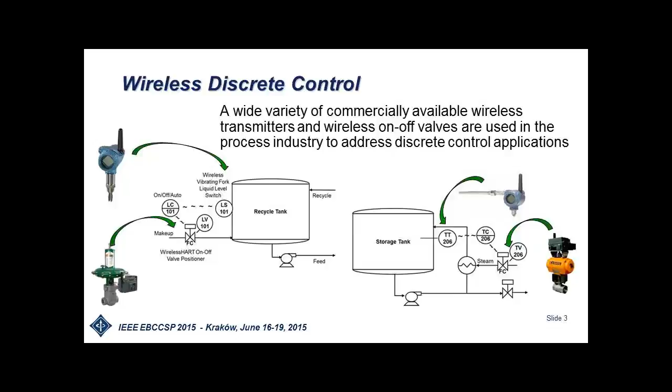In terms of continuous control, there's a wide variety of continuous measurements today to instrument your process control system. Initially those were put in primarily just to monitor what's going on, but people have found that the technology is very reliable. And in many cases, rather than just looking at something, they really want to tie it to closed-loop control.

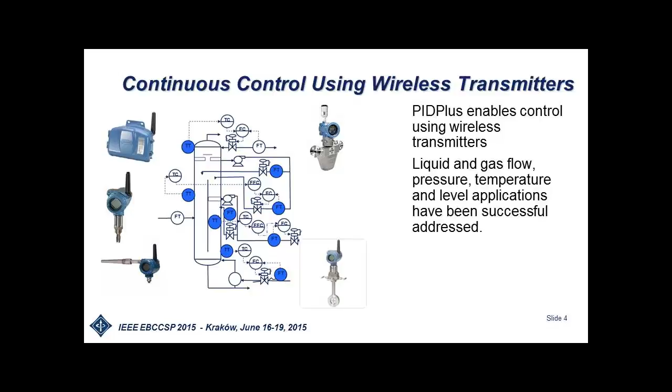One approach to addressing closed-loop control is to modify your PID algorithm to be event-triggered in terms of the update of the reset contribution and the rate contribution. That's called PIDPlus, and there are a number of papers we've written about that. It's a very effective technique for handling the wireless measurement, where the actual tuning of the control is based strictly on your process dynamics—totally independent of the sample rate, doesn't matter. So it's a very effective, very robust technique.

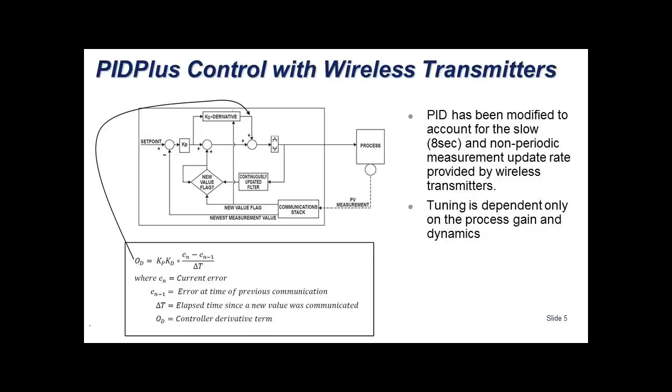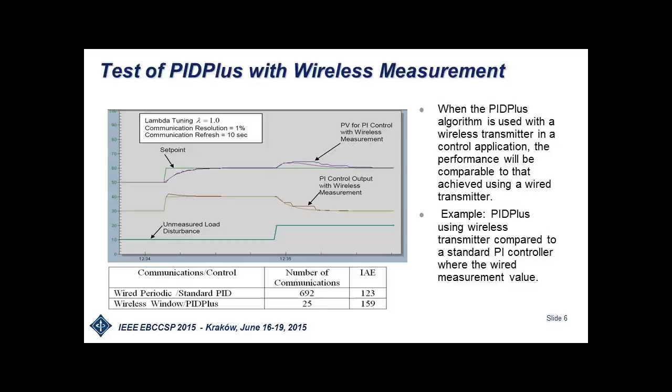But now let's get into wireless throttling valve. There are certain applications where there's a real demand for this, like fracking and oil production. The actual cost of installing field measurements in these oil fields is quite high, and if you can eliminate the wires, you can dramatically save on installation cost. So there's quite a market demand for wireless throttling valves.

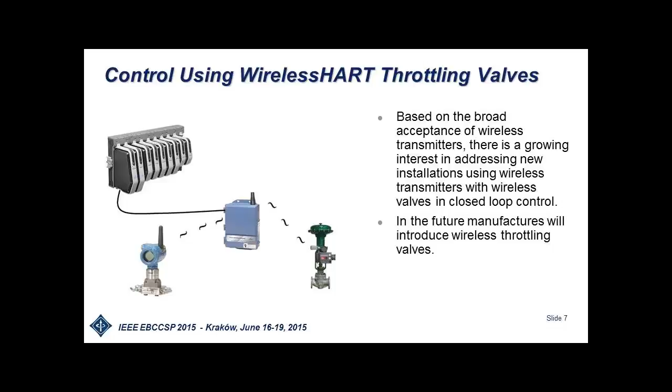Conceptually, if you think about a wireless throttling valve used with a wireless measurement, you'd be taking something like the PIDPlus, and maybe using the external reset, that is the measured position, coming into this network, the positive feedback network used to create the reset action. Conceptually, it should be quite straightforward to incorporate in either a motorized actuator or one that's air operated in terms of a throttling valve.

But in practice, there are a number of challenges. The actual communication to the actuator right now is not scheduled, whereas on your measurement side, all the measurements coming in are scheduled. That means on your measurement side there's very little delay between the actual sensing and using it in control, so you're introducing very little delay or dead time. Whereas here, you can have quite a lengthy delay.

Also, in terms of the actual sensing of where the actuator is, the feedback of that in response to a write command can also be quite lengthy in terms of time because it's an unscheduled communication. There are some things going on in terms of downstream publishing that are going to improve this, but today there's quite a bit of delay, and even with downstream publishing, you'll still have some delay there. So that's really the challenge.

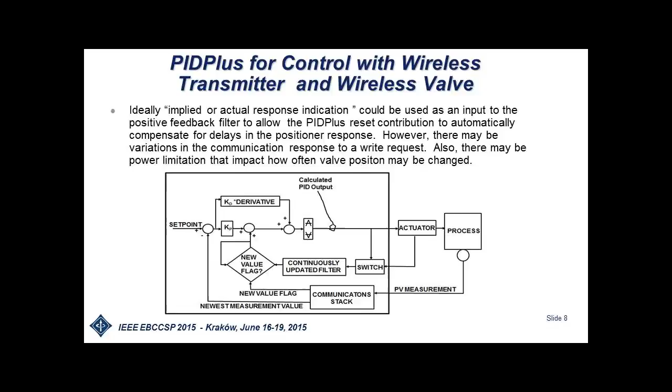So one of the things we tried that has been quite effective is where we have the calculated output only communicate if certain criteria are met. The criteria is that the output has to change by more than this deadband from the last communicated value.

So periodically we're going to evaluate this, we're not evaluating it constantly, we do it periodically. So if we have exceeded the deadband and we have gotten a response from the last write command, then it's valid to actually output a new position to the valve. This minimizes the number of times you're actually going to be changing the output.

There's also this default time which says if I haven't changed by more than the deadband, but the time since my last communication has exceeded the default, then go ahead and communicate it anyway. That allows you to drive the output to exactly a value, not being limited by this deadband in terms of your resolution. So that's what has been used in terms of minimization of movement.

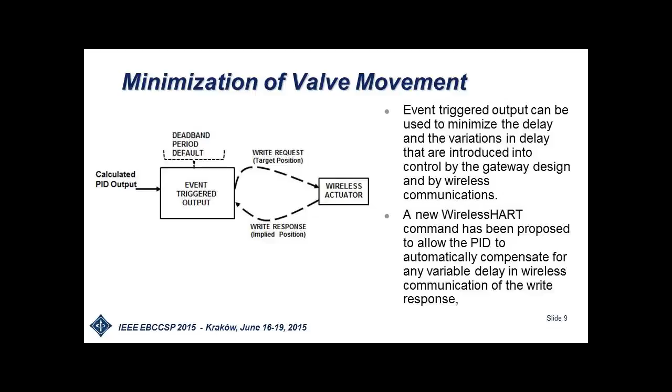The other thing we are working with is a new HART command. Using WirelessHART for wireless communication is introducing a new command called time to apply, which says that when I ask for a change in position, I also communicate when the valve should change in the future.

Because if you look at this, we'd really like to know where the valve is to be able to use that in our positive feedback network. But if we have a delay going down and a delay coming back, you really can't sense at any time the position. But if when you send out a change command you say it's going to change in the future, it then becomes very possible to always calculate where the valve is, even though you can't measure where it's at.

This new command called time to apply illustrates the fact that in some cases when you send out a request, it may take 3 seconds before the valve gets it, another time it may be 1 second. But if you set a time to apply of, say, 4 seconds, then you always are going to know when the valve actually changed, even though you can't sense it or measure it at that point in time, so you can calculate it.

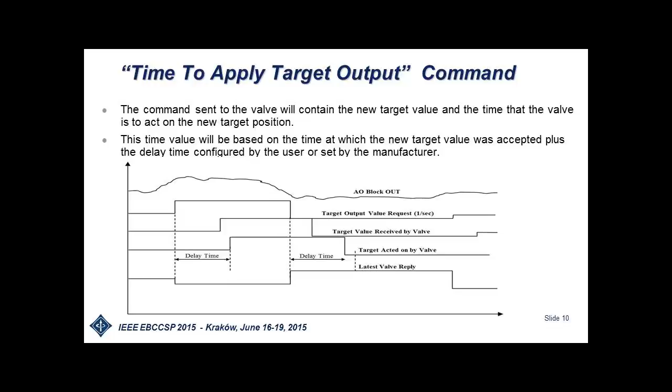So the combined scheme then is this minimization of movement by looking at deadband period and default, plus the use of this time to apply command, and then we can calculate where the valve is, even though we can't sense it.

And so this allows us to do a very effective job here. In terms of event trigger, our output change is event triggered. The actual update of our control is really triggered by new communication. But you notice it's also a blend of continuous operation. This PIDPlus is maybe executing every 200 milliseconds, even though the measurement is updated every 8 seconds here.

The reason for that is that as soon as a new measurement comes in, you don't want to wait in terms of taking action. You would introduce more delay in terms of your control. So it's an important consideration.

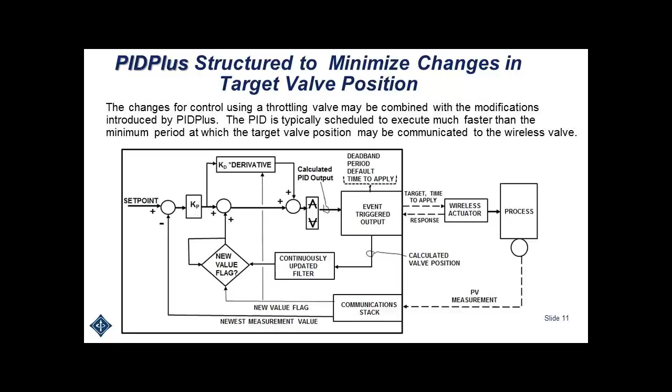This shows in a simulation environment where we're comparing a wired PID with a wired valve and wired transmitter to a control loop where we have a wireless valve and a wired transmitter. For set point change, where we have a 3-second delay going down, 3-second delay going up, you notice that it's very stable in terms of control.

You do notice that delay, though, in terms of the response, just due to the fact that this time to apply puts some delay in terms of the response you see. But from a control and stability standpoint, we're very good in terms of that.

In this case, we took exactly the same control loop, exactly the same tuning, no change in tuning, but we changed the delay down and back to 6 seconds - rather significant delay. And you notice, again, very stable operation, no futzing with tuning, no changes there.

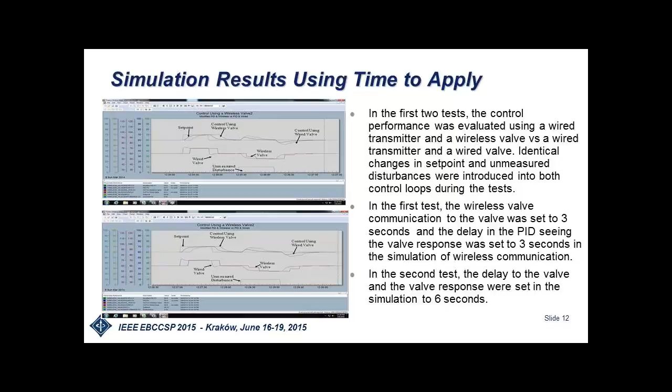This shows a combination of wireless transmitter and a wireless valve in a simulation environment, where on the wireless transmitter, the period was set at 6 seconds. That means the device wakes up every 6 seconds.

And if the change in measurement exceeds 3%, then it actually would get communicated. Otherwise, it wouldn't get communicated unless the time since the last communication exceeded 12 seconds, and then it would be communicated anyway. So this again shows the combination of wireless valve, wireless transmitter, no change in tuning. It behaves very, very well, very stable.

So you can do a lot of things in a simulation environment that when you actually get out into the real world, things don't quite go the same way. And so we've done quite a bit of testing, both at customer sites and in-house.

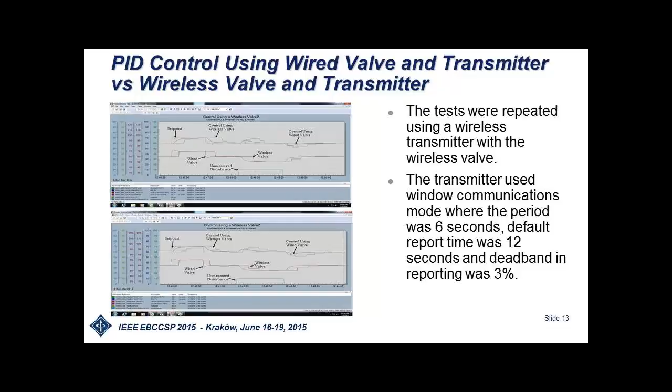And fortunately, one of the divisions of Emerson is Fisher Controls, and they have one of the world's largest flow labs up in Iowa. So we have the opportunity to go up there and work with them, where you're using flow rates and valves that are of industrial size when you're actually doing testing.

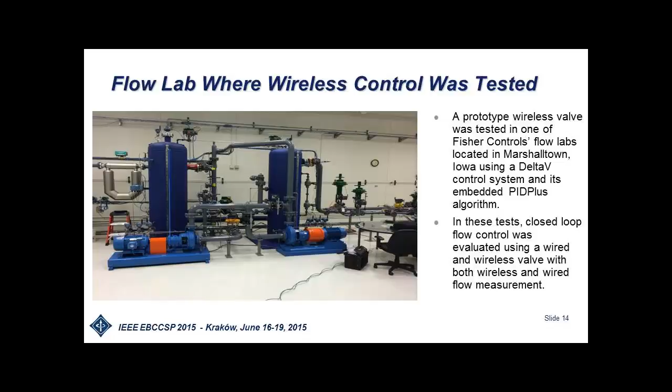So we could then control flow rate with our valve. We could introduce disturbances by changing this restriction downstream. So it allowed us to both test for set point change as well as unmeasured disturbances in terms of control. So we really did quite extensive testing of this.

Wireless measurement, wireless valve, any combination of wired and wireless, using the minimization or not using minimization. So we did some really very extensive testing of this.

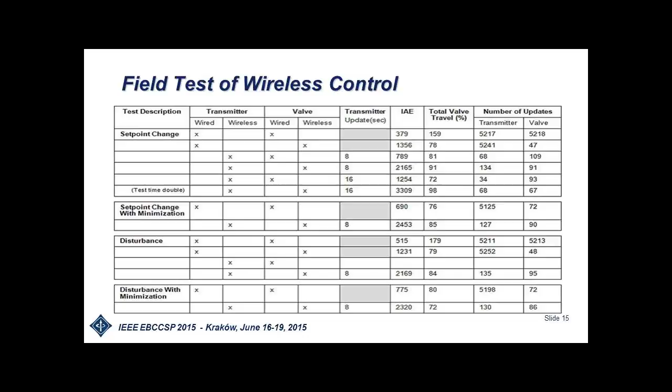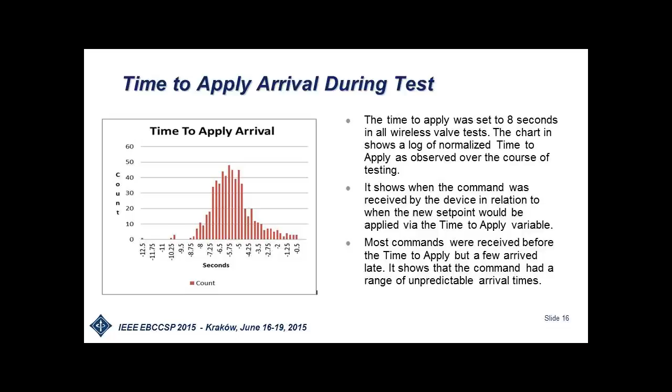The time to apply in that particular case - this is sort of a histogram of what we actually saw there. You notice the actual time to apply was somewhere around 6 seconds to catch maybe half of what's going on. In our testing, we actually used 8 seconds as the time to apply. So that's sort of reality in terms of this unscheduled downstream communication and unscheduled response going back. You notice it's really quite substantial in terms of the delay.

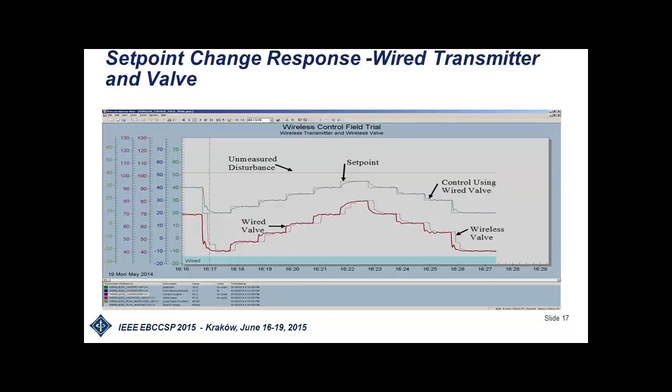Here's where we're introducing that downstream valve changes. The control then had to respond to those unmeasured disturbances, and so you notice it had to do quite a bit of work to compensate for that.

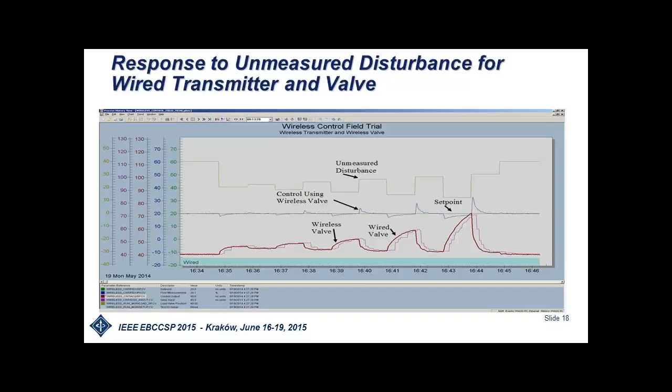So here's where we had a wired transmitter combined with a wireless valve, with our time to apply of 8 seconds. The tuning we used here is exactly the same tuning we used for wired, no futzing with tuning at all. Tuning is only based on process dynamics. You'll notice a very good response, stable, no hunting or other things going on.

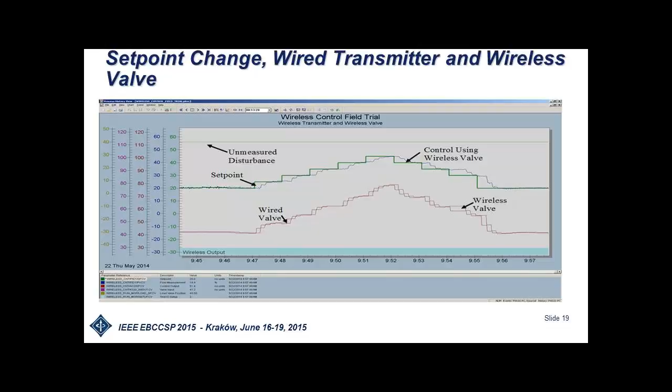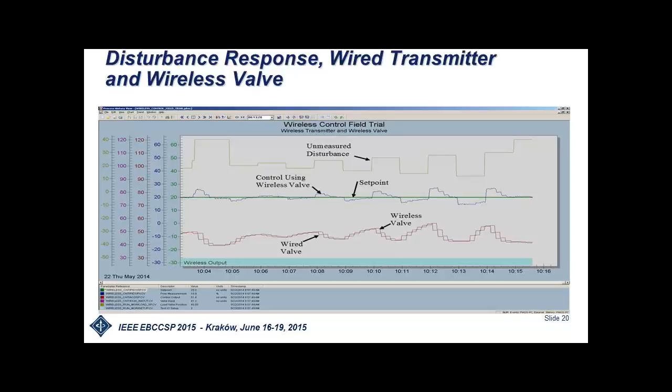Here's the response for an unmeasured disturbance downstream. Again, had to do quite a bit of work to correct for that. Here we used a wireless transmitter, wired valve, looking at that, and then the response for disturbances.

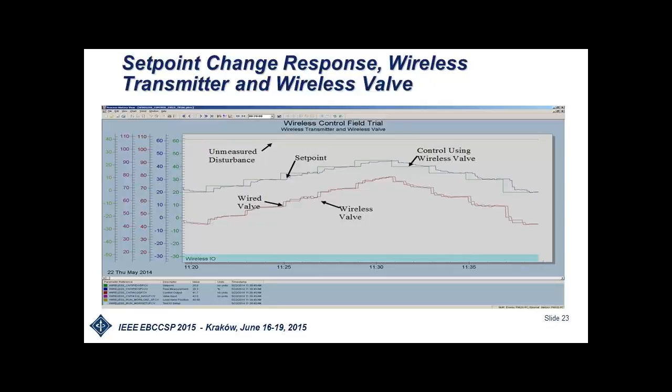And here we then showed wireless transmitter and wireless valve, so the combination of two, the totally wireless loop. And again, you notice there is a delay due to the time to apply, but the actual response is really quite good, we thought, given all the considerations we had to address here. So very stable operation, no hunting, no changing in tuning to do, going from wired to wireless. And that's the disturbance rejection.

So we're doing some more testing of this. We're working with a major oil company right now in terms of looking at putting this out in the Bakken area, doing some totally wireless control in the oil fields.

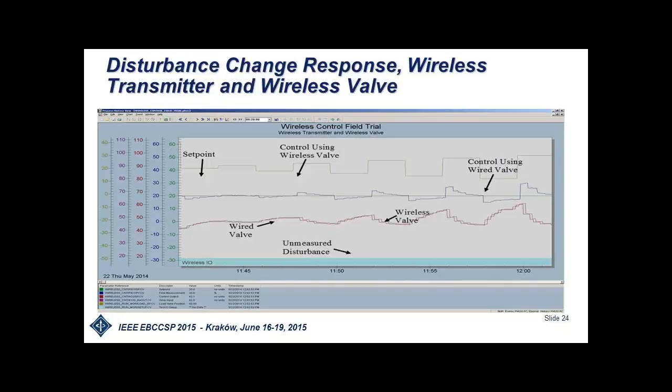But something a little closer to home is UT. We're located in Austin, Texas, and UT is just down the road from us. They have a wonderful facility called the J.J. Pickle Research Center, many hundred acres of facility. In one corner of that is the separation research unit, where they have two fairly large distillation columns. Oftentimes when we're trying new control techniques like wireless, we'll be trying it out there, very close to industrial size unit.

This is a new process they've put in called a divided wall column, and Willie will be talking about that on model predictive control. This technology is something that in Europe you're a little bit ahead of us in terms of using. Basically, with a divided wall column you can do ternary separation, that is, separate three components using one column, which would normally take two columns to do. So you can get about a 30 to 40% energy reduction by going to this technology. But one of the problems is that you have a lot of interactions when you start doing that kind of thing, so it becomes a control challenge.

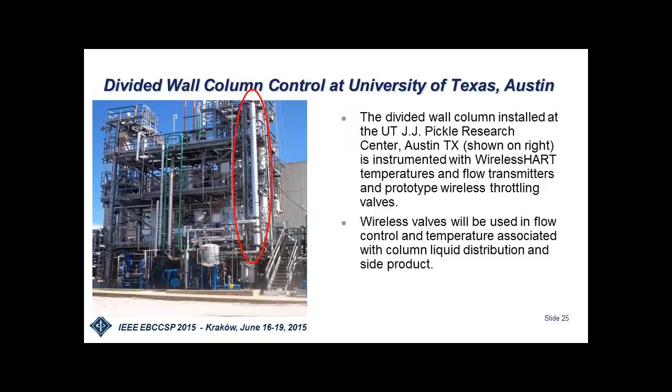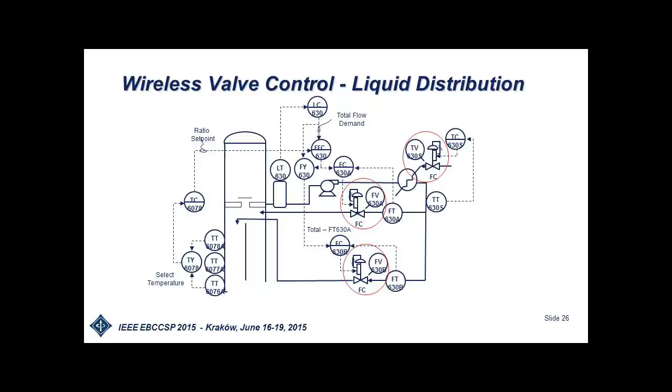We've been working with them in terms of control definition and commissioning. On that unit, one of the things we're going to be doing in the next few months is actually putting in these wireless throttling valves. They're working with hydrocarbons there, so we have to have Class 1 Div 2 certified devices to go into that. We're sort of waiting to get those kinds of devices we can then put in, so it's put a little bit of delay in it, but you notice here liquid flow and steam flow are going to be done wirelessly.

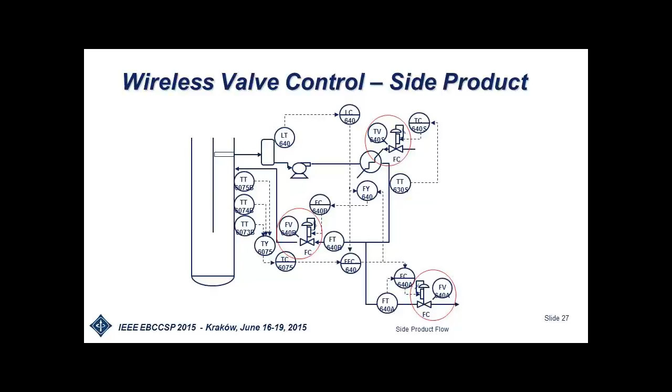So we'll be doing quite a bit more demonstration of this technology on a fairly important process, on some fairly critical loops there of the unit. So in summary, this wireless throttling valve is something you'll be seeing here in the near future.

PIDPlus works quite well with this time to apply. So blending the two technologies, wireless measurement and wireless valve, is something that's very much doable without much problem. We've done fairly extensive testing using a prototype wireless valve. A more commercial version of that we'll actually be deploying in some instances later this year. So the future is that wireless throttling valves will become a reality in certain applications, and that's going to be an important part of addressing those applications.

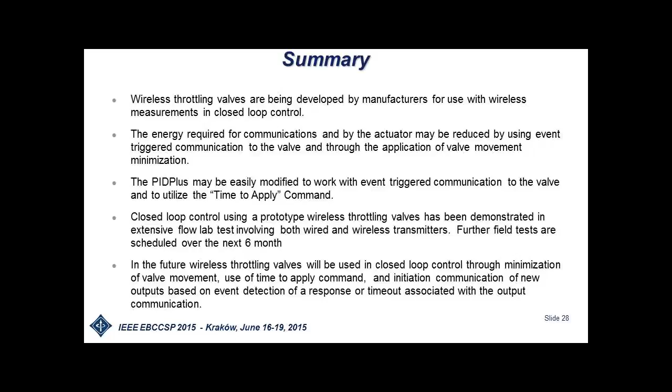But if you're interested in knowing a little bit more about PIDPlus, wireless valve, the testing that was done in the flow lab, that goes into infinite detail on a lot of these things.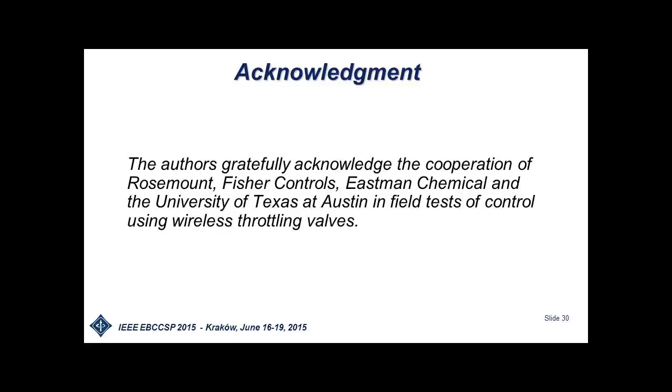So with that, I'll be glad to answer any questions. Thank you, Terry, for a very nice presentation. Oh, thanks.

And so you have a 10 millisecond slot to communicate. So when we say periodic communication, that is the period — that's the time when the device wakes up. If it wakes up and says, well, I think I need to communicate because I've had a change, it doesn't have to worry about contention with something else needing bandwidth. That is its bandwidth at that time. And so you get very, very little delay in terms of the actual measurement getting up to your gateway.

So you use contention slots in WirelessHART for the communication between controller and actuator? Yeah, scheduled slots in a superframe, in the other case. Right, so there are open spaces in the schedule, so it has to sort of wait for that open space. And that's why you're seeing such delays going down.